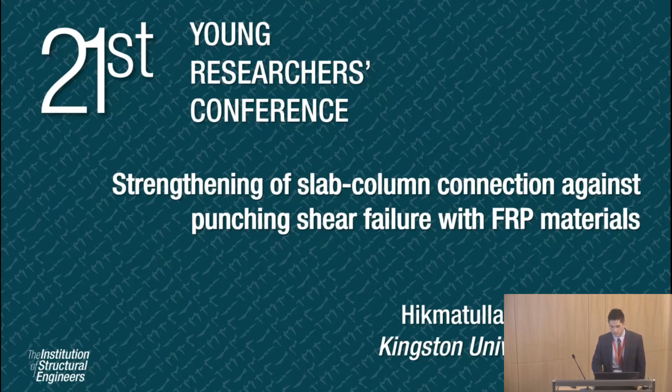My research is regarding strengthening of slab-column connections against punching shear failure with fiber-reinforced polymers. Flat slabs have been widely used for the past century due to their numerous functional and economic advantages. However, the slab-column connection is one of the most critical D regions in an RC structure due to the complex state of stresses present in this region.

The combination of locally high bending moments and shear forces at this connection increases its sensitivity to brittle punching failure. In this failure mode, the slab collapses around a truncated cone over the column, which may eventually lead to progressive collapse of the entire building. This failure mode is often the governing failure criteria in flat slabs.

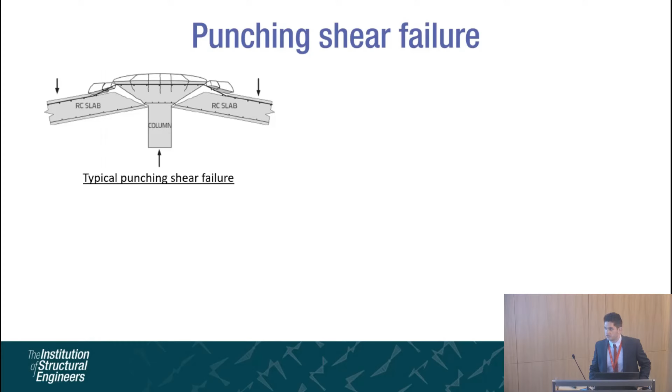With this specific case, the main issue was shorter anchorages in combination with corrosion of the flexural reinforcement, which led to failure of this connection, the slab.

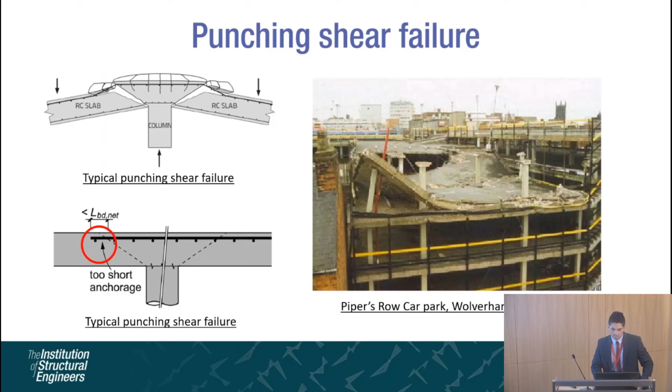The number of aging structures is increasing. There are similar structures to Piper's Row car park which are in need of retrofitting. Strengthening is often needed due to corrosion of reinforcement, probably due to freezing and thawing attack, chloride-induced penetration, or fire damage, or there could be a whole lot of other reasons which will require strengthening.

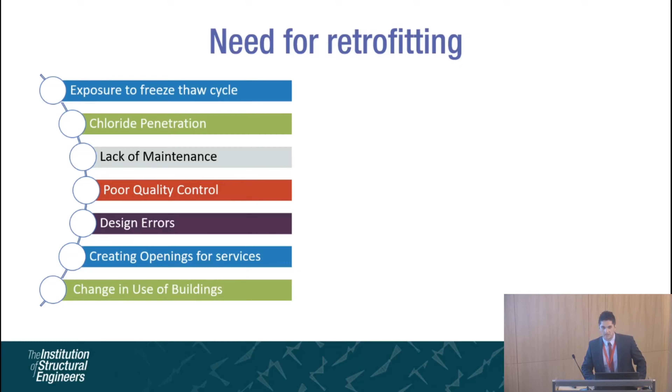The strengthening is often needed to increase or to restore the initial design capacity. The existing methods for improving the load-carrying capacity of flat slabs are steel plate bonding, provision of column drop, and section enlargement. However, these methods are elaborate, expensive, and intrusive to the structures.

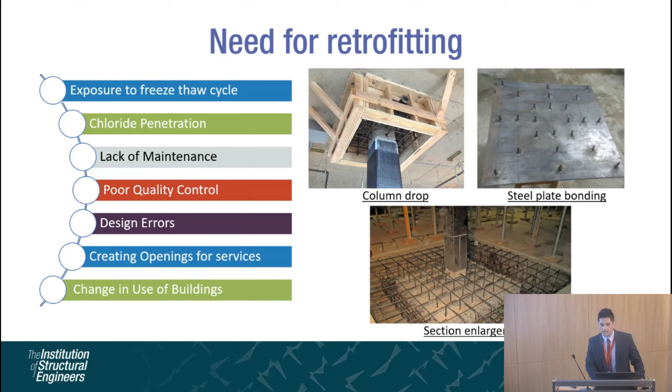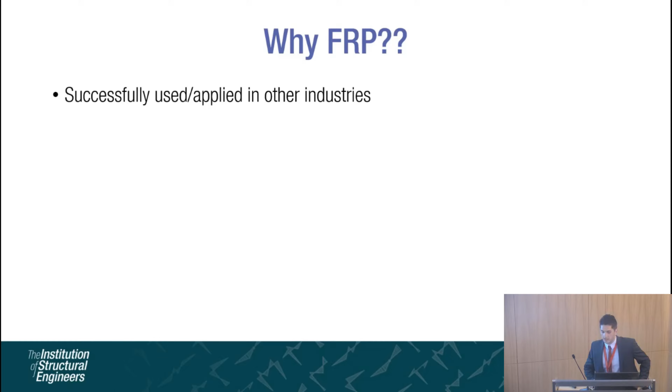FRP materials have been studied over the past two decades, and they fulfill the shortcomings associated with current strengthening techniques. So why should we use FRP? FRP composites have been successfully used and applied in the field of mechanical and aeronautical engineering. It has evolved these industries, allowing for production of more lightweight, efficient, and reliable components.

FRP composites possess significantly higher tensile strength than steel reinforcement, and mainly its corrosion resistance, which could be one of its major uses in marine environments.

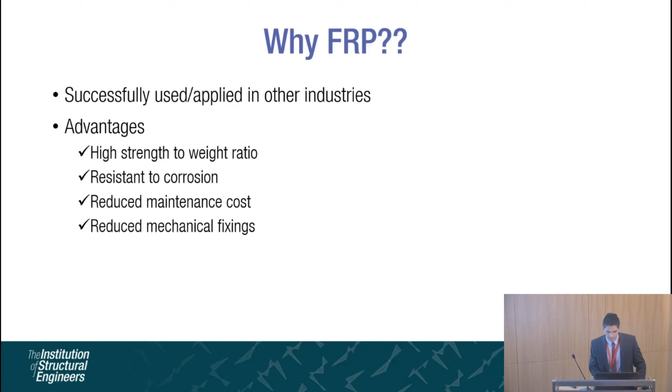All of them have different properties in terms of tensile strength, carbon being the highest, and AFRP and GFRP being somewhere in the middle. As comparison to steel, it is significantly higher. For this research, we have chosen CFRP reinforcement for strengthening purposes, primarily due to its high tensile strength.

Currently, there are design guidelines for strengthening of existing structures, but they do not cover strengthening of flat slab junctions being strengthened with FRP materials. And there is insufficient experimental data to support the development of codes in this area.

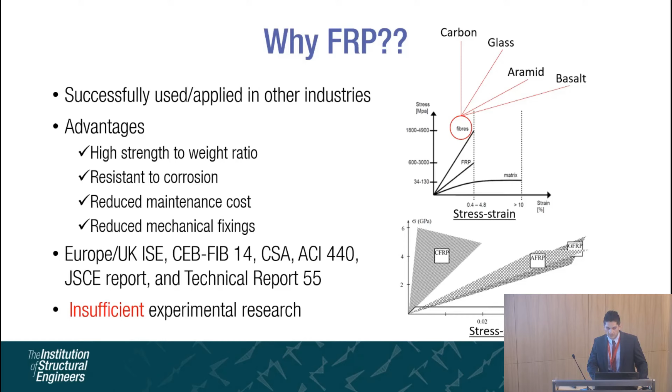In the experimental program that we conducted, a total of 12 slabs were tested. 9 of them were strengthened with FRP materials, and 3 of them acted as control samples. They were square slabs with dimensions of 1.5 by 1.5 meters, with a thickness of 120 millimeters, and a central column of 150 by 150.

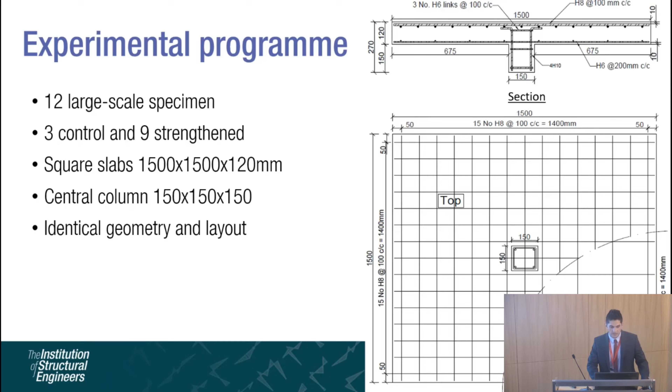All of the slabs have identical geometrical layout, and the reinforcement were similar. They were designed to fail under punching shear. We used two strengthening methods.

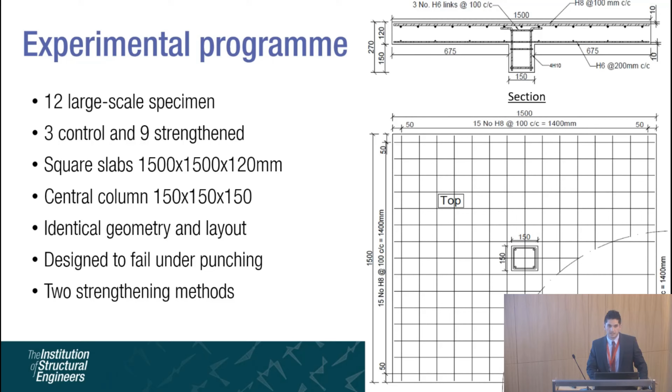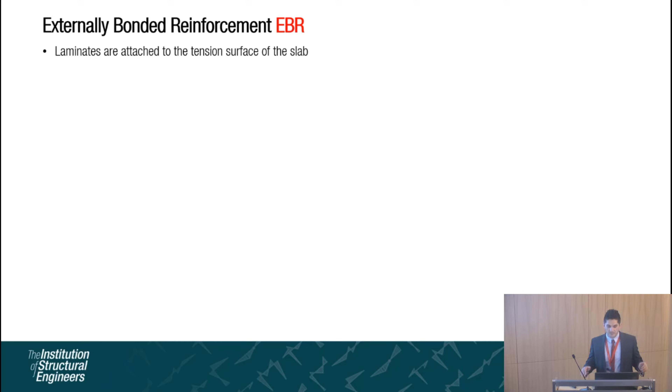The strengthening methods that we use are externally bonded reinforcement and near surface mounted reinforcement. In the externally bonded reinforcement method, FRP laminates are attached to the tension surface of the slab using epoxy adhesive. These are basically acting as flexural reinforcement, which will indirectly increase the punching shear capacity of the slabs.

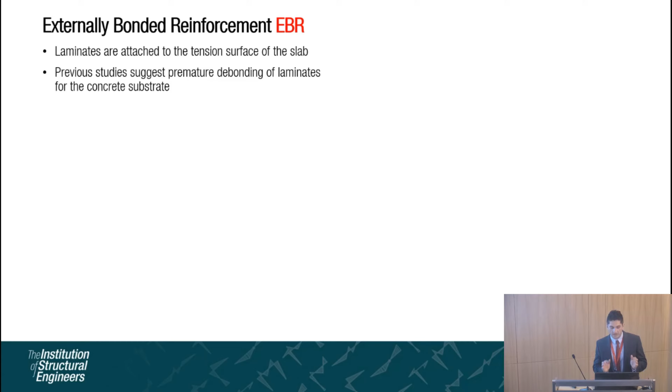There have been some previous studies in this regard, but there is a major concern with external strengthening with FRP: premature bond failure of FRP from the substrate, which is the concrete, is one of the major issues. Before reaching its maximum level, when it reaches a load of up to 70 to 80% of its maximum allowable capacity, it debonds from the surface of the concrete. So that was one of the main concerns of this research that we have addressed.

In order to address this issue, we have introduced something called transverse anchorages. In this first set of experiments, there were 4 slabs: one was control, the second one was strengthened with FRP, 50 millimeter wide laminates with 1.2 millimeter thickness, and at the bottom, 2 of the samples, the transverse anchorages could be seen.

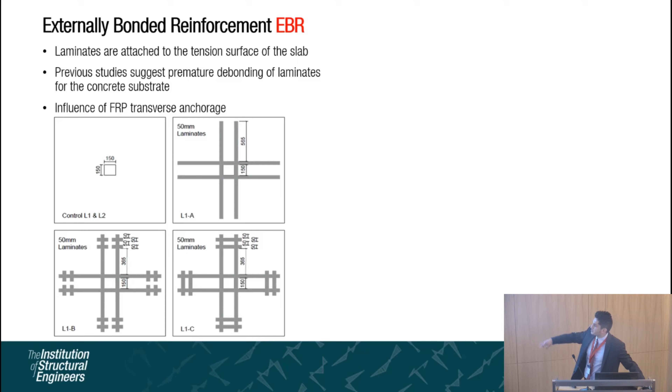The reason for selection of these anchorages was that initially we tested slabs in order to find the strain profile inside the concrete. When we measured that, the strain is very high towards the center, and it exponentially decreases as we move away. So potentially, by placing these transverse anchorages where the strain is very low, debonding will not occur at those specific regions at lower stages of the loading.

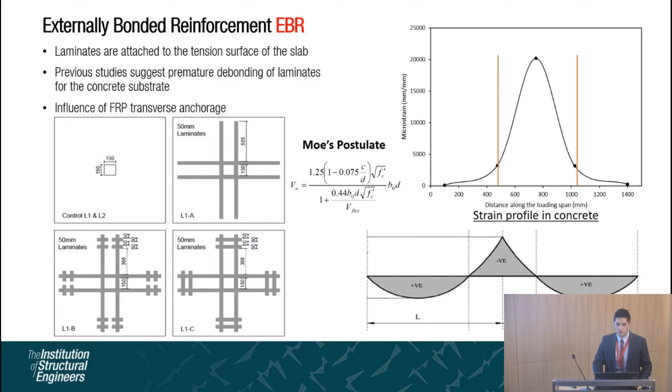Based on Moe's postulate, because these are acting as flexural reinforcement, it will be contributing to the punching capacity.

The second method that we used was a near surface mounted method. In this method, grooves are created inside the concrete and FRPs are attached using epoxy adhesive. The remaining cavity is then filled and leveled.

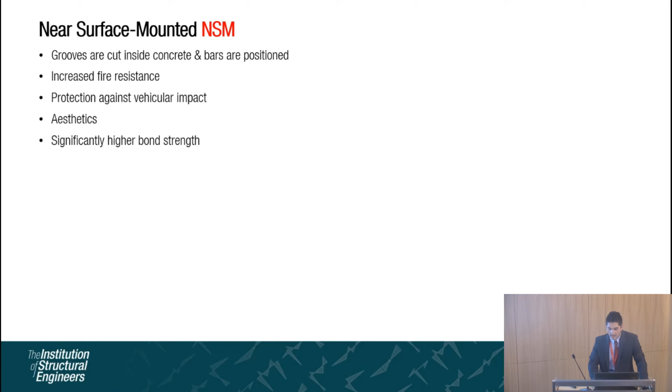The major advantage of this method as compared to externally bonded method is, initially we did some testing of bond test, and this was found to be more than 200 to 300% stronger bond strength as compared to EBR.

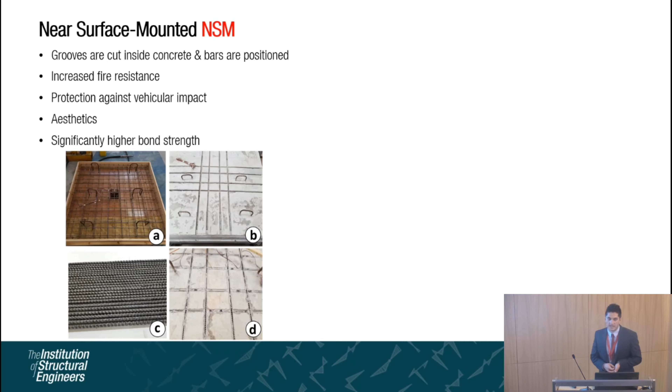They have increased fire resistance because the FRP is protected inside the concrete, and it's aesthetically pleasing, specifically in the region of the car parks where there is the negative moment. It will be protected against the accidental damage from the cars and the tires damage.

So we use 2 strengthening layouts, layout number 1 and layout number 2. In layout number 1, we have 2 reinforcement in each direction, and layout number 2, we have 4 reinforcement in each direction. All of these reinforcements were additionally added after casting.

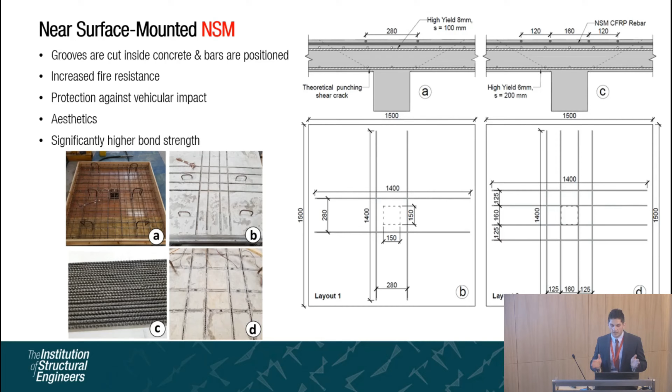They are made of carbon fiber reinforced polymers. In each layout, we used 6 millimeters, 8 millimeters, and 10 millimeters rebar. They are positioned specifically in the region affected by punching shear.

The instrumentation was we used a number of LVDTs at the mid-span, quarter span, and at the end of the slabs to measure the deflection.

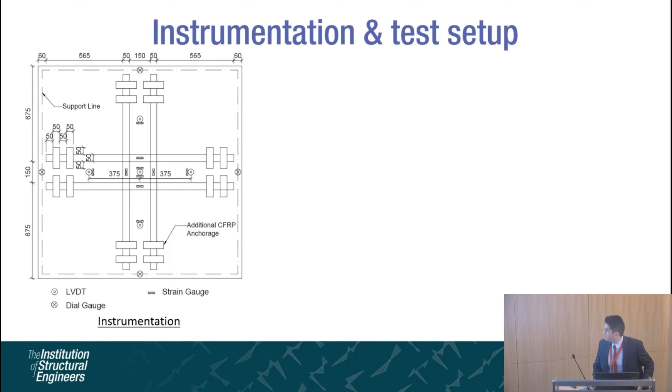A number of strain gauges were attached to the tension surface of the concrete, to the FRP reinforcement, and also strain gauges were attached to the steel reinforcement to measure the yielding of the steel reinforcement.

We developed this testing rig to test the slabs. The load was applied from the bottom. As you can see, the boundary conditions, they were free to rotate by placing smooth surface rebars.

Steel angles were placed, but they were showing some level of deformation, so we measured its deformation by positioning dial gauges, and we take this into consideration during our analysis. After the testing, all of them were tested under punching shear failure until the failure point.

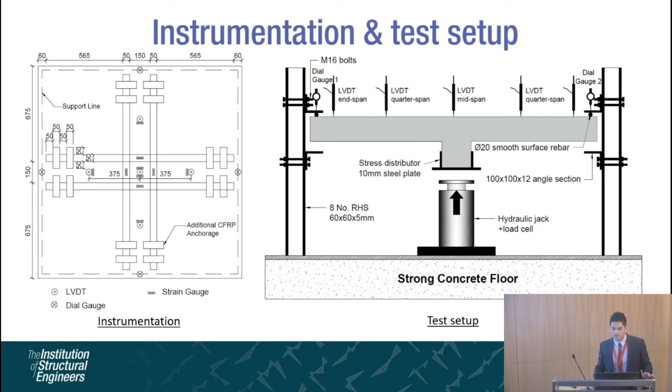So with EBR strengthening method, this is the load versus deflection graph. The control sample failed under punching shear once it reached a load of 175 kilonewtons. As expected, the second sample, once it reached a load of over 150 kilonewton, because it did not have additional transverse anchorages, it debonded, and then it reacted in a very similar way to the control sample, so it didn't actually contribute to increase in strength.

With the 2 other samples, which were using two different types of transverse anchorages, we can see considerable increase in the stiffness and in the ultimate load.

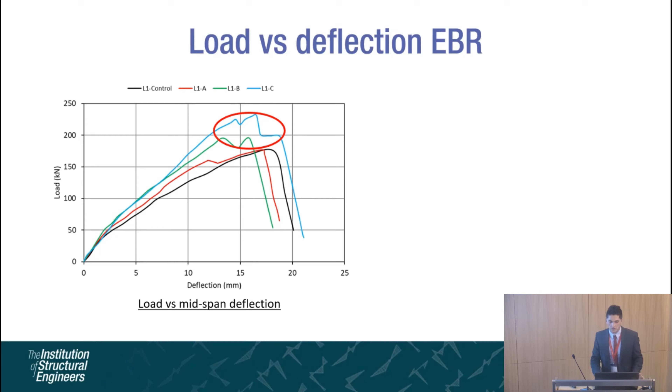If you can see, there is a drop after reaching the maximum load. It's showing failure of one of the anchorages. So by placing 2 anchorages next to each other, we are gaining additional strength. We are describing this as residual load, so it will be used as a warning sign. So once the sample fails, the first anchorage fails, the people can vacate the building and it could be restored.

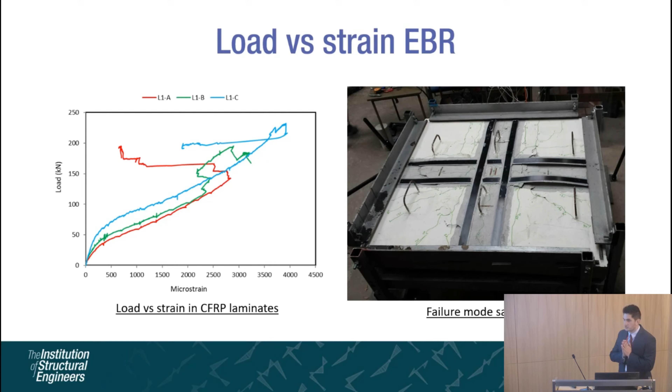With the near surface mounted method, as we can see, it maintained a very strong bond with the concrete. No debonding occurred during the failure.

As we can see, the considerable increase in ultimate load could be obtained with strengthening layout number 1 because it had only 2 FRP reinforcement in each direction. On average, it increased the load by up to 18%.

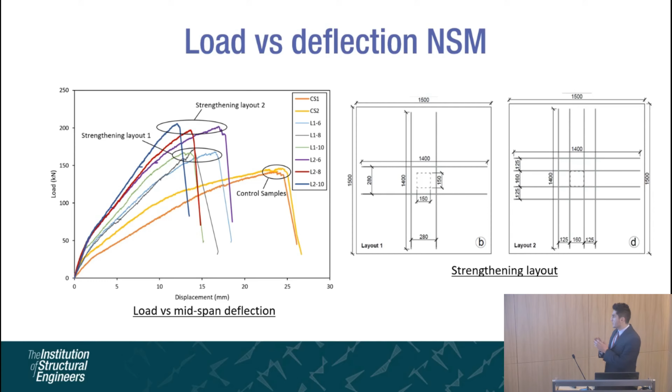With the strengthening layout number 2, on average, it increased the load by up to 41%. So the amount of increase in load and its stiffness is directly proportional to the layout and to the number of reinforcement available placed in the slab.

With the load versus strain graph shown, the strain level is much higher as compared to the EBR method, which contributes to the increase in load.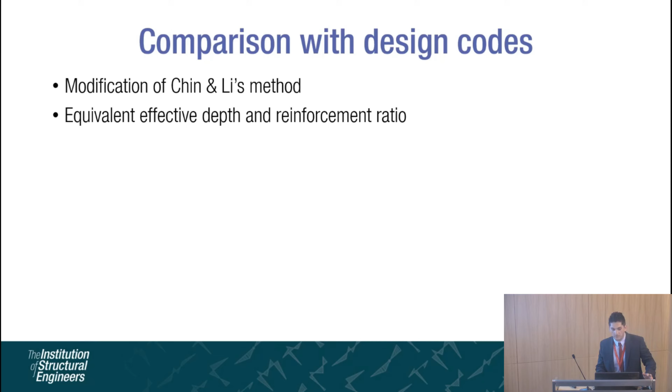Failure occurs when the concrete reaches a strain of 0.003 or when the FRP rupture occurs, whichever comes first. So the CFRP acts as additional reinforcement. The detailed calculation is shown over here.

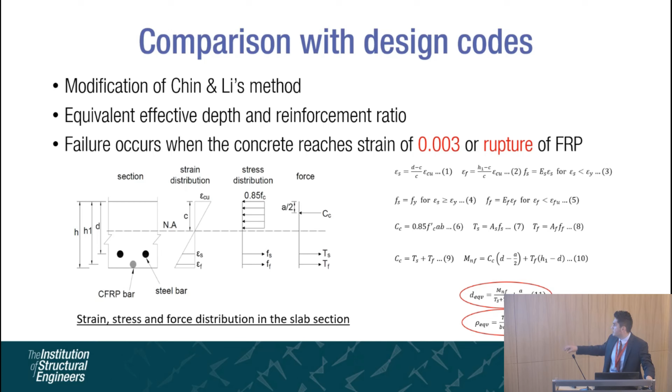So we will be introducing these 2 new terms, and these will be swapped in the design codes, the D equivalent and rho equivalent. The experimental values were compared against the ACI, Eurocode and FIB model code. So these values were changed.

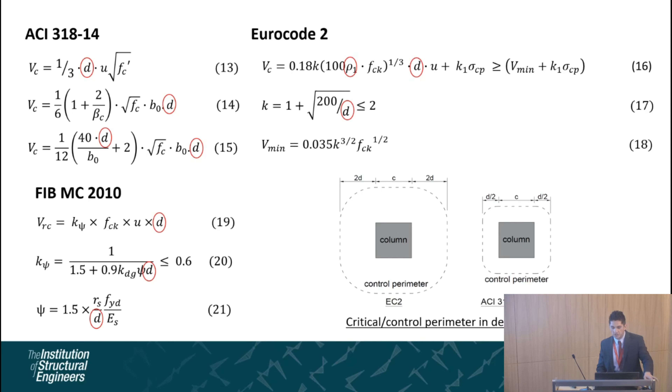And the Eurocode 2 was the most efficient out of all of them. The reason is because it takes both the effect of effective depth and reinforcement ratio into consideration. The ACI and the FIB model code do not take the amount of reinforcement into consideration. That's the reason their predictions are more conservative.